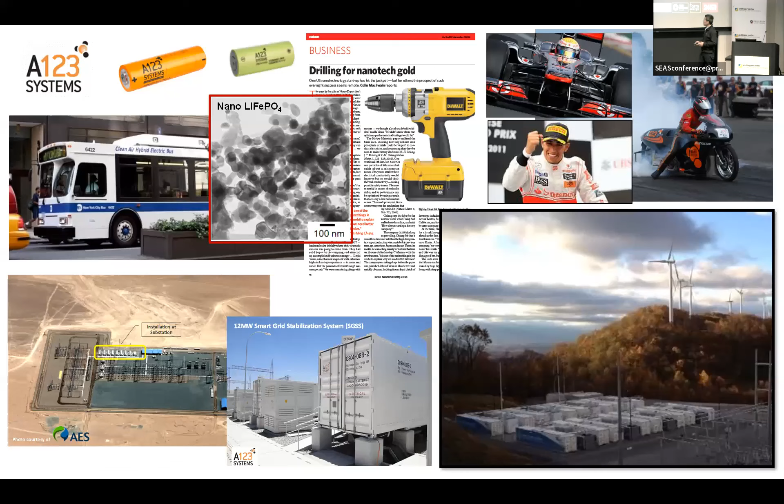So first, let me say a little bit about lithium iron phosphate, and what we did in this case, a company called A123 Systems. People always—some know and some don't know—where this name comes from. So what's this alphanumeric naming scheme you got here?

It turns out that A sub 123 is a force constant—I'll show you that in just a second. But what happened in this case was that we actually started off doing something related to self-assembling batteries. But in the course of identifying materials for self-assembling batteries, we came across lithium iron phosphate, which was then a new cathode material that had not really made it into commercialization at any scale.

We ended up making batteries and building six plants in China, two plants in the United States, and in roughly the 2008-2009 timeframe, we started attempting to manufacture batteries here in the US. This was a high-power lithium-ion battery, and the first product was a power tool. Today it's taken for granted that electric vehicles are fast accelerators, but back then the image was more of a golf cart, and that's what my friends used to joke with me about.

We did a number of things to show that these are high-power batteries. In 2008, Lewis Hamilton won the Formula One title using A123 batteries in the first hybrid system. Every lap, he could discharge once, and he got a lot of power out of that one discharge, and passed a lot of cars.

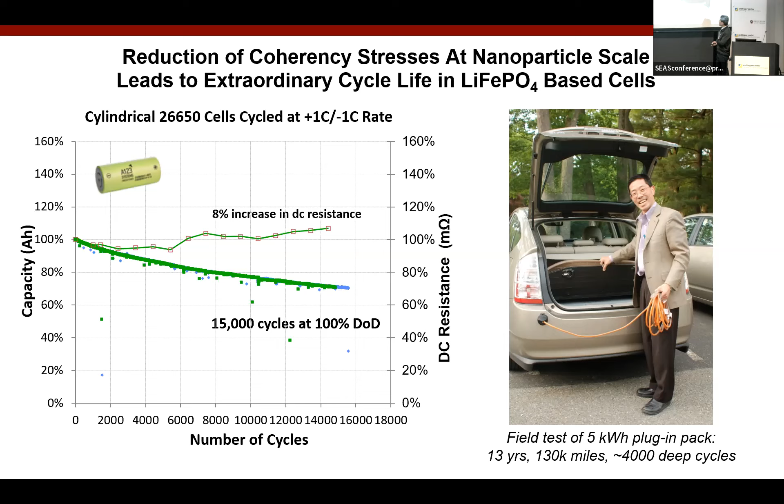We actually started the company based on a concept for self-assembling batteries, where the cathode and anode would repel each other due to negative van der Waals forces, which only can happen between dissimilar materials. We wrote a paper and demonstrated that this could actually work, but we didn't think it could work well enough in practice.

So roughly less than a year into the company's life, we realized that we were sitting on lithium iron phosphate, which is a very interesting material published on, and that we should pivot. So that was an example of a pivot — we pivoted into lithium iron phosphate, and that's where we ended up.

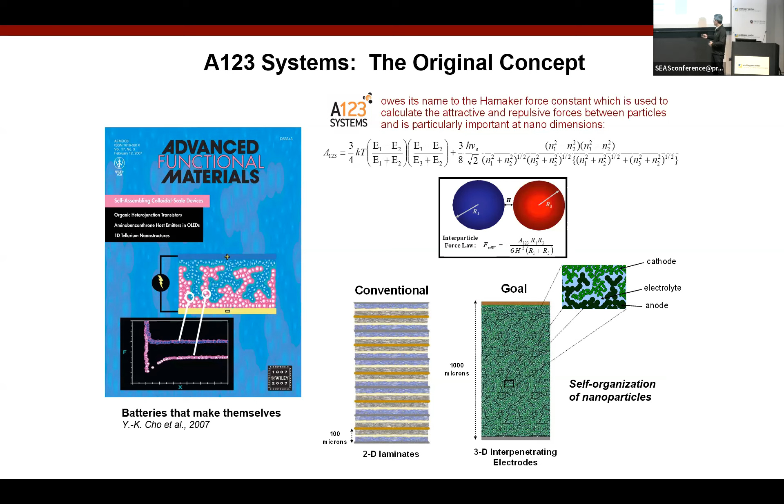That experience with lithium-ion battery manufacturing — what eventually happened to A123? Well, A123 went into bankruptcy around, I think, 2010 or 2011, because of the following phenomenon. We had built 2 factories in Detroit, or near Detroit, that had a capacity of 430 megawatt hours of battery a year — not a gigafactory, but approaching half a giga. Sounds like a lot, but the market simply wasn't ready at that time.

The largest customer was Fisker Automotive. Their entire production over the entire life of that company was less than one-tenth of that annual capacity of manufacturing. Power tools was fine, but when it came to building large EV cells, there simply wasn't enough of a market. It would be, I think, a very different story today. So eventually, the technology that was in A123 went out into 4 separate companies.

The prime acquirer of the technology, Wanxiang Corporation, is one of China's largest auto parts makers. The lithium iron phosphate business went to Johnson Matthey. The grid storage business, those grid storage trailers I showed you, went to NEC of Japan. And then there was a defense and aerospace business which went to a small company in Michigan. So the technology kind of went forth, but the company didn't, right?

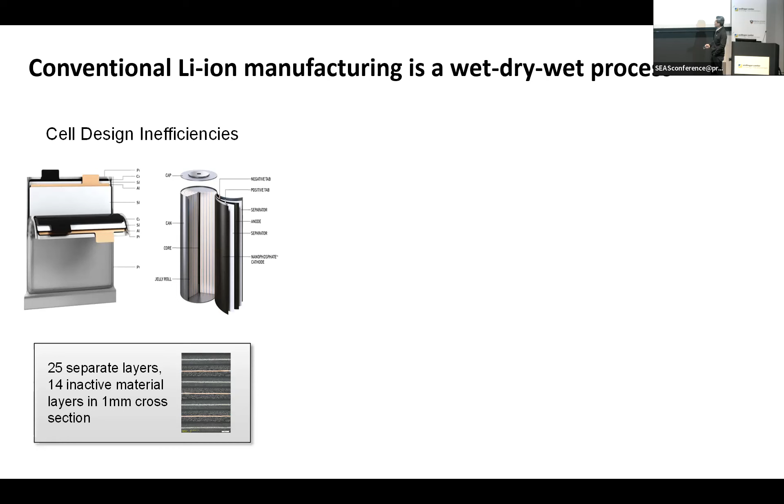One of the things I learned during that time is that the process of making lithium-ion batteries is arduous, complex, failure-prone, and has simply too many unit operations in series in which you can suffer yield losses at each point. I've often made this analogy that if you look at a lithium-ion battery and the number of very fine layers we have, it's the equivalent of baklava. It's a very fine, so it's a bulk product, but it's made entirely of thin films. In this case, these are sub-100 micron films.

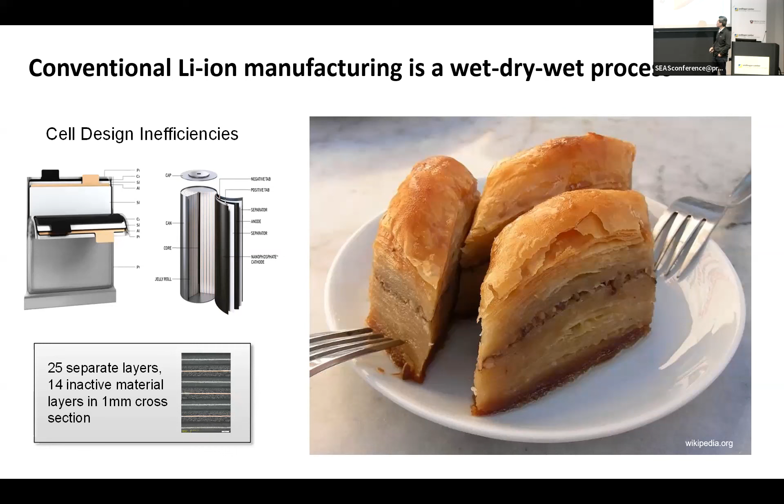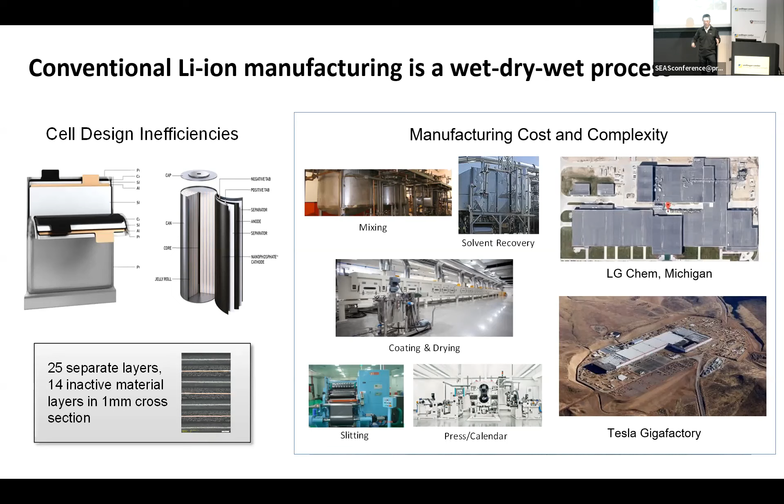One of the things that didn't make sense about this whole process is starting with something wet, taking you through a boiling process—and that's an energy consumption that is undesirable—and then recondensing it to recapture that solvent. So this wet-to-dry process, and then at the end, infusing a liquid electrolyte again, seemed like an unnecessarily complex process. So I had the following idea.

What if we were to get around all of that and not make electrodes, but instead make electrodes that were, from the very beginning, a fluid? So this was supposed to be a flow battery. I think there's a little animation here which shows how this is supposed to work.

We showed that you could take battery cathode and anode materials and design a suspension which was electronically conductive, ionically conductive, and would flow well enough—it wouldn't always jam the fuel cell stack. Most of the time it would jam it, but you could make it so that it would work. You can make a flow battery this way, and here's some data for a lab-scale flow battery. So we thought this is a way to get around the entire manufacturing process.

We started a company called 24M. 24M is named after the concentration in molarity of a lithium-ion battery electrode—24 molar. That's a very high concentration, you'll appreciate. But that's what we were able to do with these liquids. So that's pretty cool, so we named it 24M.

So we pivoted again though, and let me explain how this happened. A flow battery has a lot of attractive features, and probably many of you in the audience know these. You can decouple the energy storage from the power, so you have a lot of flexibility in how you design that. You have components that can be replaced. Importantly, you don't have to make coatings—you don't need a coating line. And we thought all of those were advantages.

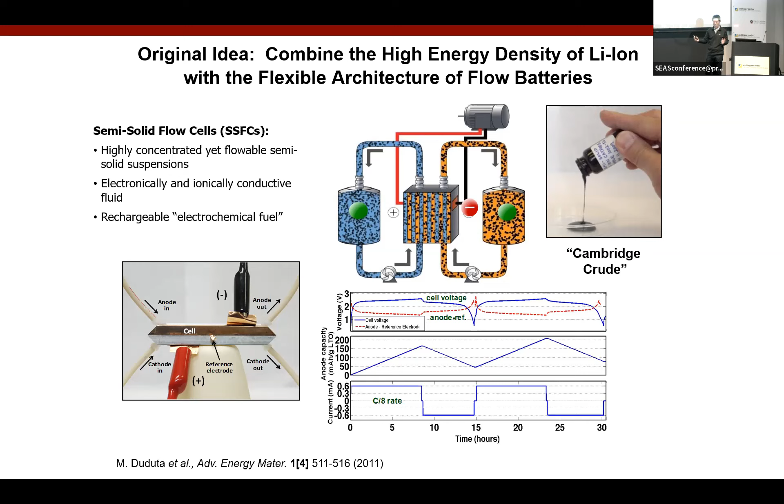But when we sat down and did the techno-economic analysis, what we realized was that the cost benefit in building a battery like this, as opposed to building a regular stack battery, was actually only a few percent, and probably didn't justify the complexity of the whole system. So that resulted in a pivot to a different way to use the same capability.

And this is something called the semi-solid electrode. Currently a lot of people get confused and say, wait, are you a solid-state battery or are you not a solid-state battery? I said, no, we're a semi-solid electrode. It's a battery based on this electrode, which if you hold it in your hand, feels like a damp dish rag. But what it is, is an electrode in which you use the electrolyte as the processing solvent, so you avoid that drying process.

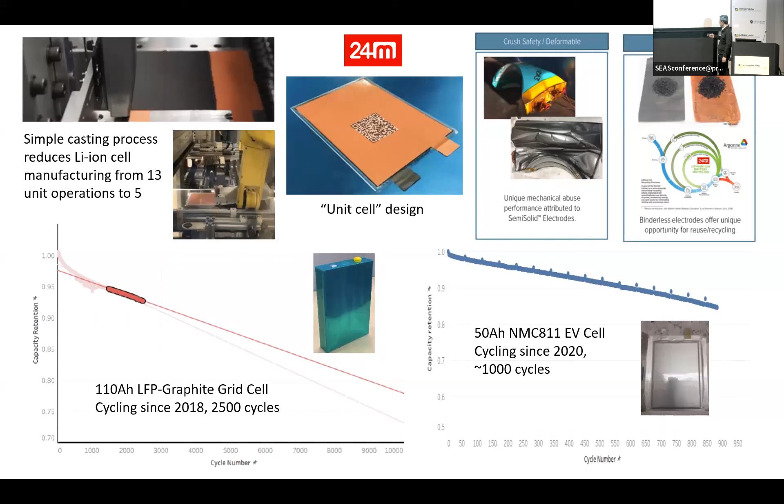So what has happened here is that this was a process innovation, a manufacturing approach. And to get to scale, we decided after a lot of consideration that the best way to do it was to license it as broadly as possible to as many manufacturers as possible. Right now there are 6 or 7 licensees. The most recent one announced was VW, who now owns 25% of this company.

But the first one was Kyocera, and they have their own manufacturing plant in Japan where they make these batteries based on this design for grid storage, supporting solar panels and solar arrays.

Okay, another example of a pivot here. One of the questions I often get asked as a result of having worked in lithium ion is, looking forward, can lithium ion do it all? Now I want to turn to the story of grid storage - this is where I've been spending a lot of my time over the last few years. We all appreciate that lithium ion is a very well-developed and also rapidly scaling technology today. It's embedded in our daily lives.

But the problem we need to address with the decarbonization of electricity is this: from 2020 to 2050, these are all projections, but what this projection says is that solar and wind will grow. Nuclear doesn't show it growing - I actually hope it does grow. But solar and wind will grow, though we'll still have this base load. Coal will disappear, but gas will remain. If we quantify this, it's 780 gigawatts, and later I'll try to figure out how much storage you need in order to take what is a renewable asset that's intermittent and turn it into baseload.

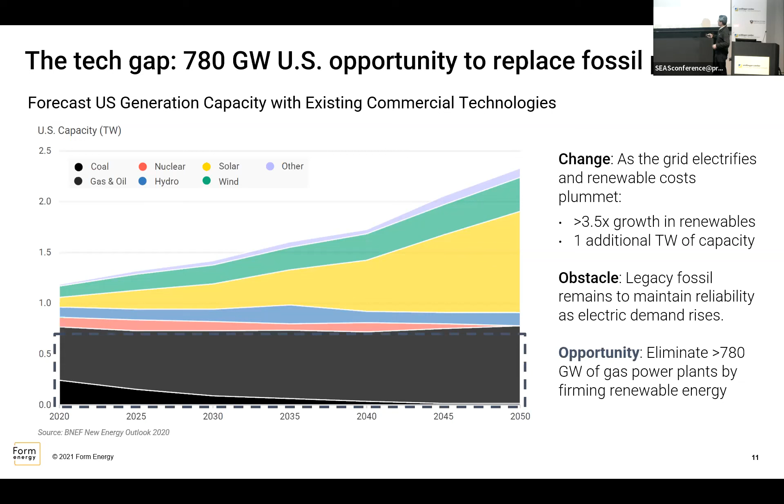But thank you. I'm afraid I can't answer that right away, but we can look into that again.

So here's an example of long duration. It used to be that someone would show up and say, we want a battery for long duration applications. How long do you want it to be? We'd like it to be 4 hours. Okay, today what long duration refers to is really multi-day.

This is all 365 days in Texas in 2021. I'm not sure my pointer will work here, but you can see up here where there are these gaps, especially in the top row, January and February, where it's multiple days.

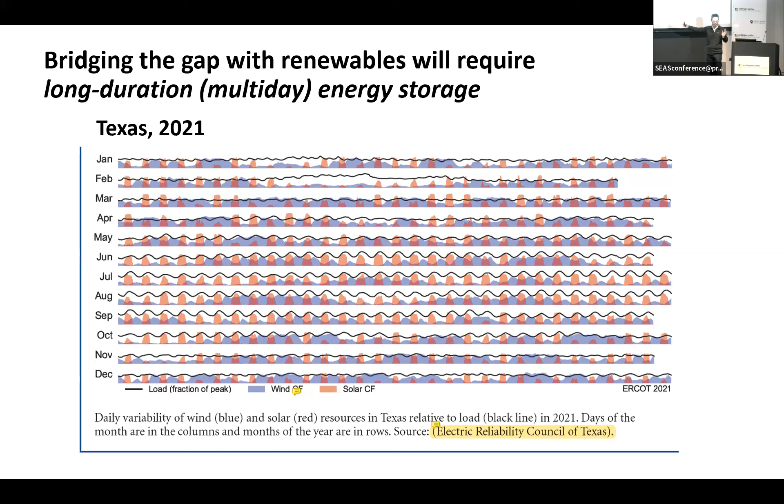Now, there's an argument that eventually you might need an entire season. If you're in Antarctica, you get sun half the year and none the other half, so that's clearly different. But for most of what we need, we'll need multiple days, maybe a week, 2 weeks. So I'm going to use that as a target, and round it off to roughly 100 hours.

So what do we need in order to do that? There are a lot of ways of describing the cost targets for long duration storage, but I'm going to use the simplest one possible. We could get into duty cycles and a bunch of other things and energy throughput, but I'm going to try to simplify it to just this very simple equation.

We have the cost of a natural gas plant, and I'm going to call that $2,000 a kilowatt. If we are competing against natural gas, and we need to store for multiple days, we'll call it 100 hours, 4 days here. Very simply, the dimensional balance tells you that what you need is about $20 a kilowatt hour.

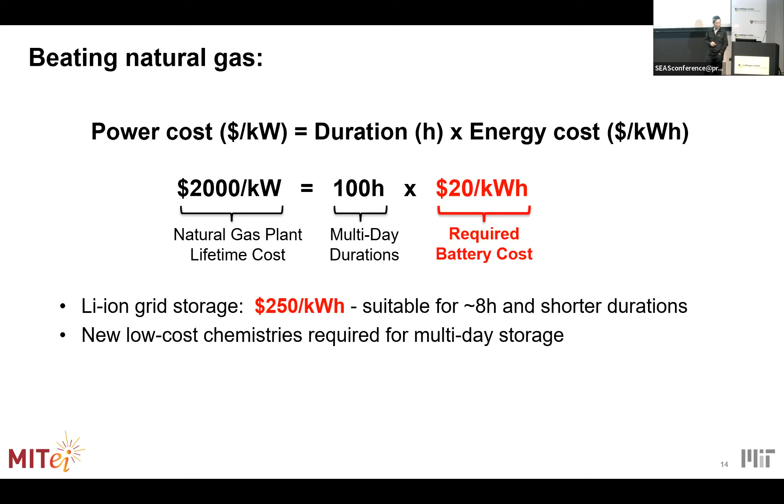So next, the question of how much storage does this really translate to? I have 2 data points here. One is an analysis done at the MIT Energy Initiative, and the second is a recent report from late last year from McKinsey and the Long Duration Energy Storage Council, a trade organization.

They come up with 2 numbers. The first number here is 100 terawatt hours, and you see some of the assumptions that go into there. First, there's an estimate for the US, then multiplied by 10 for the world. The McKinsey study says 80 to 140, so I'm going to round it off to 100 terawatt hours. So what does 100 terawatt hours mean?

It's not a unit we deal with in our daily lives. So one way I think we can think about it is that if in the year 2050 we have 10 billion humans on the planet, this would mean that every 10 people have a battery somewhere supporting their electrical needs, about the size of a Tesla Model S battery pack. So that's what this scale means: 100 terawatt hours worldwide.

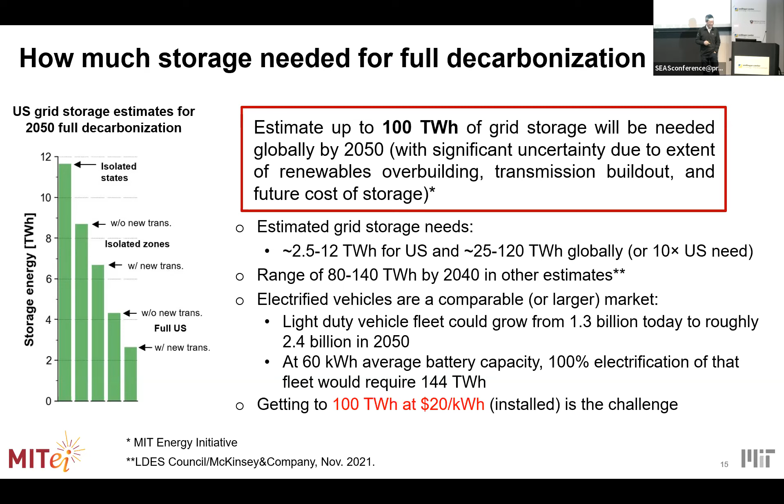Most people react to that as, okay, that seems not crazy, that you might need that amount of storage. So, what are the constraints on lithium ion then? Can we get there with lithium ion? And also, you probably saw that we could double that number if we take into account the EVs that we're going to build over the same period of time. So maybe it goes from 100 to 200, but it's of that magnitude.

So this is a busy plot, let me explain what it shows. References are from my colleagues at MIT Energy Initiative, Elsa and Bob Jaffe. The CAGR on the vertical axis is the compound annual growth rate in production of that metal, mining and production of that metal.

The histogram over here is over the time period that you see, what were the annual CAGRs? So year by year, how much the production changed. In some cases it shrinks. But in this case, you see that the most lithium production ever increased in a single year was 10%.

If you're going to reach 100 terawatt hours by the year 2050, this is what the compound annual growth rate has to be. And what you see is that in the case where all of the lithium you mine goes towards batteries with no other consumption, you need 10%. You might say, okay, maybe we could do that. But keep in mind this means you have to have 10% a year, every year, for the next 28 years.

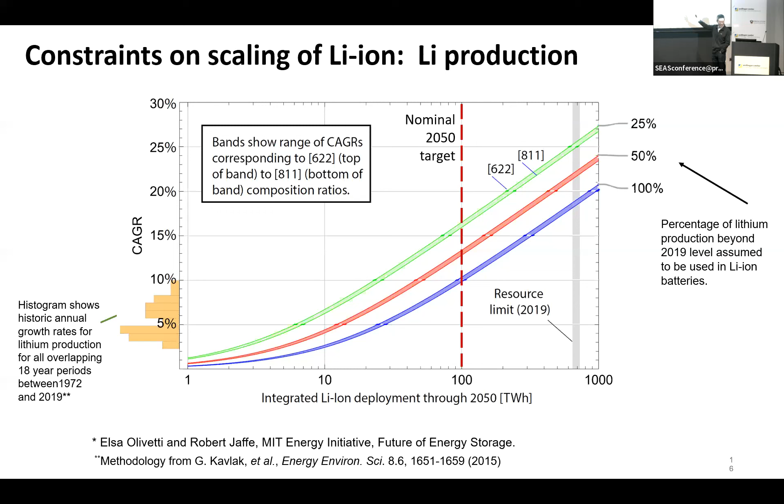So this is a complicated plot, and I'm pausing here because I'm going to show you two more just like it. Cobalt and nickel, same idea. Histogram on the lower left shows historically what's the CAGR in production for each of these metals, and what does it have to be to reach that 100 terawatt hours?

Again you come to the same conclusion for cobalt: there's a precedent that there was 10% in one year, but now we have to do that over 28 years nonstop in order to reach this target. Nickel is a little bit easier, but still a very significant lift.

So the overall message here is that if we were to do it all with lithium ion, we may actually have enough of each metal, but the amount of production required is daunting. I actually assume that for grid storage, neither cobalt nor nickel will be used in the long term. It'll be something like lithium iron phosphate, maybe a manganese-based chemistry. But as long as we do it with lithium, that previous chart will apply.

Are the origins of the lithium, cobalt, and nickel all coming from mining in this assumption, rather than recycling? Any role for recycling? These are all from mining. And yeah, the recycling question is a good one. How much can recycling help us out? I think the simple answer is that when you have this exponentially growing trajectory, recycling is not going to help you out for a long time.

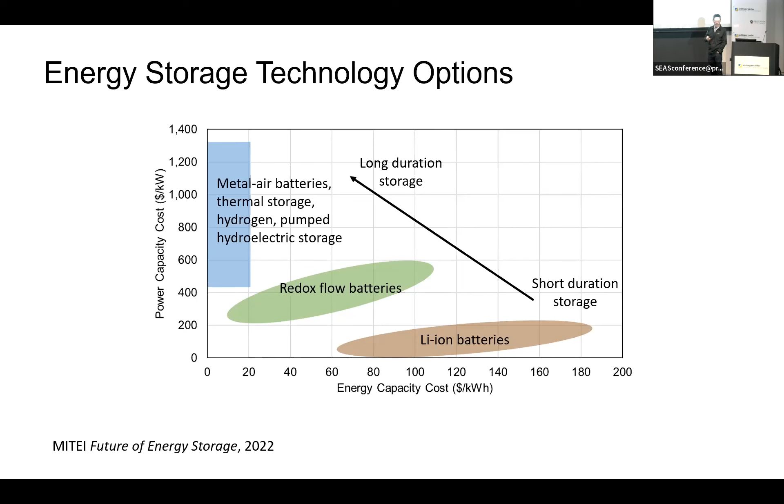And the reason for this is the following: this is a plot that we first conceived of back around 2017 as a way of looking at battery costs at the chemicals level. The argument was the following.

We're going to define something called the chemical cost of a battery, which is the cost of the cathode, the anode, and the electrolyte. You can't store energy without those 3 components.

So you take the cost of those 3 components in the right stoichiometric ratios, the right adjustment for the amount of electrolyte, and you calculate that cost divided by the amount of energy that you can store with that combination.

Because you haven't added any other components, you haven't built the battery, that's not the whole battery cost. It's a floor on what the battery cost is. It's the lowest, the cheapest the battery could ever be. By year, we plotted up all the battery chemistries we knew of at the time.

There's an updated version of this plot that will appear in the report I just mentioned. When you look at this and say our all-in cost is about $20 a kilowatt hour, which is the second line up there, you realize that only those chemistries way below have a chance of meeting these needs. And in fact, why not just go to the lowest that you see here?

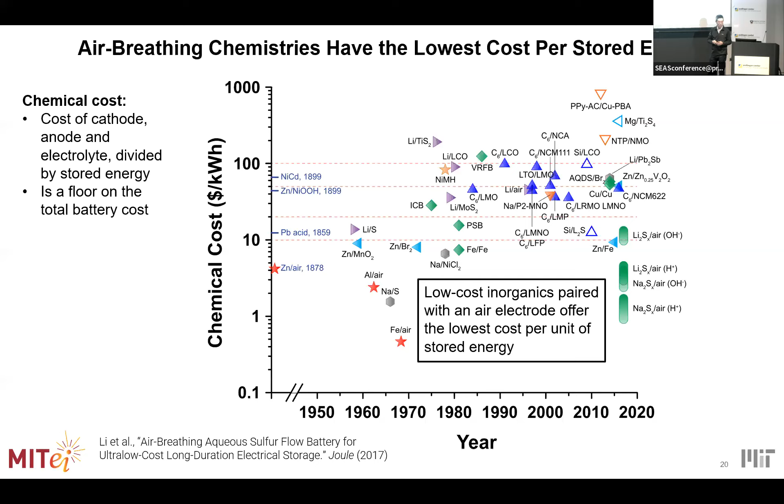The lesson here was that as long as you can use air as one electrode, air is still free, so you're obviously saving some cost there. You don't have the materials cost of whatever that electrode is, and it's going to be the positive electrode. Low-cost inorganic options like sodium, sulfur, iron, used with air, is going to always give you the lowest cost of stored energy. So that's where that thought process leads you.

What we originally started with was under the Joint Center for Energy Storage Research, or JCESR, which is a DOE hub based at Argonne. We started working on this corner here, and we developed several variants on what was intended to be a room temperature sodium sulfur battery. High temperature sodium sulfur has been around since the late 60s.

That battery has very low chemical costs, but it's a high temperature system, and by the time you're done building the system, it's over $1,000 a kilowatt hour—maybe $800 today. But if you could do it at room temperature, our thought was that we could really take advantage of that low cost of sodium sulfur and do it at room temperature.

The first idea is what appears to be a complicated chemistry here, but I'm not going to go into all the details. It's a flow battery, with a catholyte and an anolyte. The anolyte here is a polysulfide solution, and the catholyte uses oxygen, but does not directly use oxygen to oxidize or reduce the sulfur itself.

So what we have here is an alkaline side and an acidic side, it turns out. This device has a very low cost of chemistry. Over here on this plot, you see the cost of chemistry.

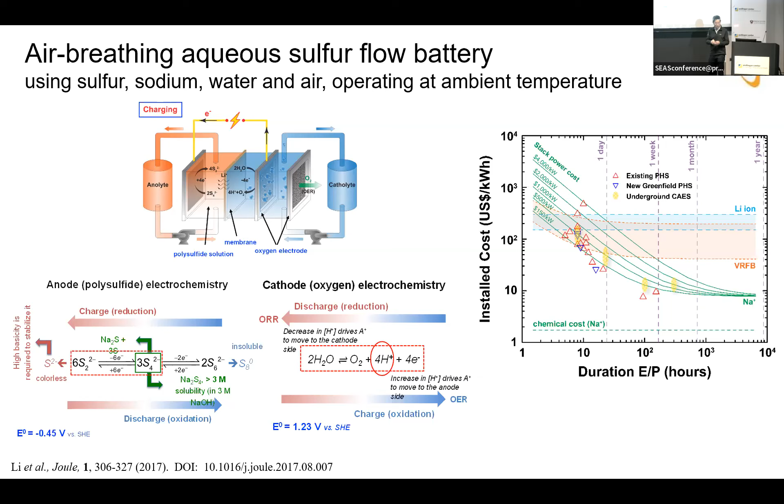So this looked like, for long durations, a design that could have the potential to reach very low cost—you see it approaching $10 a kilowatt hour here. What's plotted up here, the data points, are compressed air and pumped hydro storage. It looked like it might be competitive with that. This looked exciting enough to us that we said, let's try to commercialize this.

One of the things we discovered along the way is that, as anyone who's worked with air-breathing chemistries knows, they tend to be inefficient, because the oxidation reduction of air has a high overpotential and is an inefficient process. If you look at the cell voltage here versus charge and discharge, you quickly see that this is only about 50% round-trip efficiency.

That was concerning, except that when we did the modeling on the impact of that in a world of very low-cost electricity—this is levelized cost of electricity on the vertical scale—as a function of efficiency, if you went from 80% to 55% efficiency, it would only cost you about a penny a kilowatt hour. That was interesting because it told us efficiency was not nearly as important for these long duration storage systems as it is for something like a high-powered lithium-ion battery.

That was a critical piece of learning, because it told us that air-breathing chemistries could have a future in these kinds of applications. Okay, well, I'll tell you what happened.

I mentioned that you need an acidic electrolyte and an alkaline electrolyte. When it came to commercializing this chemistry, we found that materials challenge was really difficult. It basically required invention of a membrane that could be a single ion conductor for sodium, but could at the same time separate a strong acid from a strong base. It didn't take us very long to realize that's a really big materials challenge.

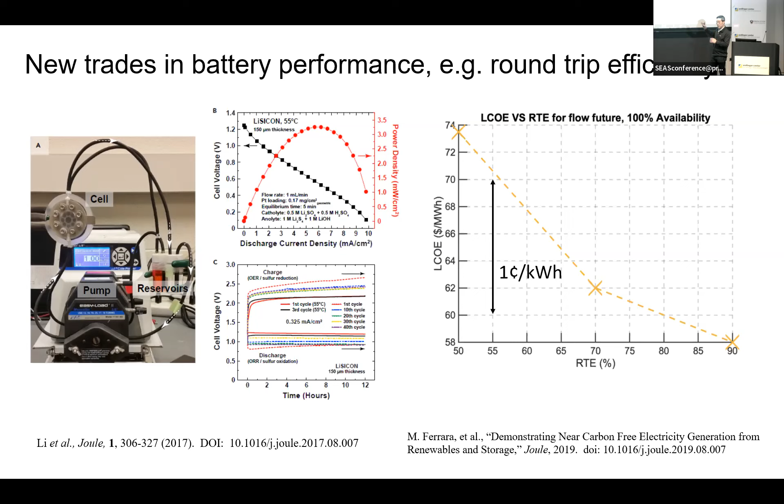But the parameters one would need to meet for this kind of storage were still there. So we turned to metal air systems—again, air breathing, again very low cost. But now instead of using sulfur, which is very abundant, let's use a metal, which is very abundant. Metal air batteries have also been around for a long time.

You can read this faster than I can say it to you, but basically, if you have anything that's a metal, or even silicon, if you can oxidize it, you can make a battery out of it. But relatively few of these are reversible or rechargeable batteries. Right now, I'd say lithium, zinc, and iron are the only ones that really are rechargeable metal air chemistries. This is the chemistry space that we look at.

And one of the problems is that these all have relatively low round-trip efficiencies. But, as I argued in the last slide, that's not a showstopper. Okay.

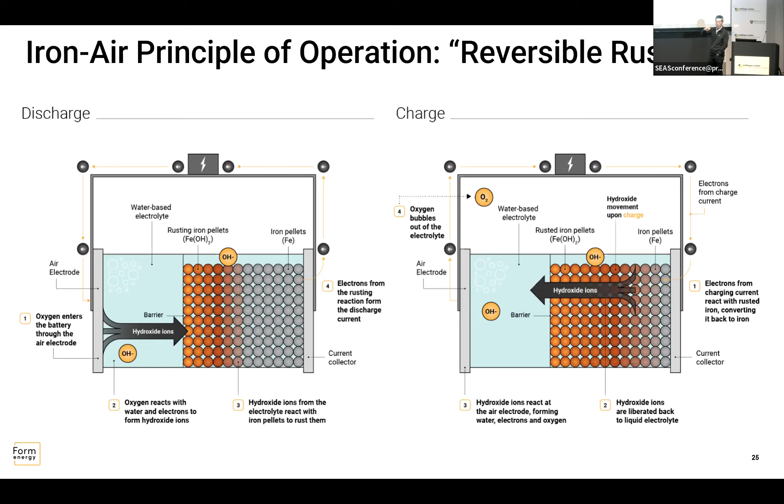Iron air, let's talk about iron air. It's pretty apparent why iron is attractive, and I'll talk about that a little bit. So the iron-air battery is really a battery in which you oxidize or rust the iron in the process of discharging it. You have to remember, if you want to figure out which direction is discharge, it's always what is energetically downhill. Iron loves to rust, so rusting the iron is the discharge step. Charging the battery is the unrusting of that iron, going back the other direction, reducing that oxide or hydroxide back to the metal.

A couple of interesting requirements come into play to make a functional iron-air battery. If you think of the air electrode, that's like the lung of the battery. The iron is oxidizing and reducing, and the air electrode breathes in and exhausts oxygen, so it's a lung. Now, our lungs are bifunctional—you both inhale and exhale. It turns out that to make an iron-air battery work, it's desirable to have two electrodes, one to inhale and one to exhale. So you have essentially two lungs, two oxygen electrodes. The green one is the oxygen reduction electrode that takes in the oxygen, and the gray box is the oxygen evolution electrode, the exhale. That's how this design works.

What you form is iron hydroxide, Fe(OH)2. At deeper discharge, you can also form an iron oxide, but that process turns out to be much less reversible. So mainly you're trying to use this first step. And here is a full cell using an alkaline electrolyte.

This is what a typical charge-discharge curve looks like. Look at the voltage on discharge versus the voltage on charge—right there you have a round-trip efficiency, and you can see that's going to be about 50%. The second issue is that if you look at the capacity, the charge line is longer—you're putting in more electrons to charge it than you're discharging. That's another source of inefficiency.

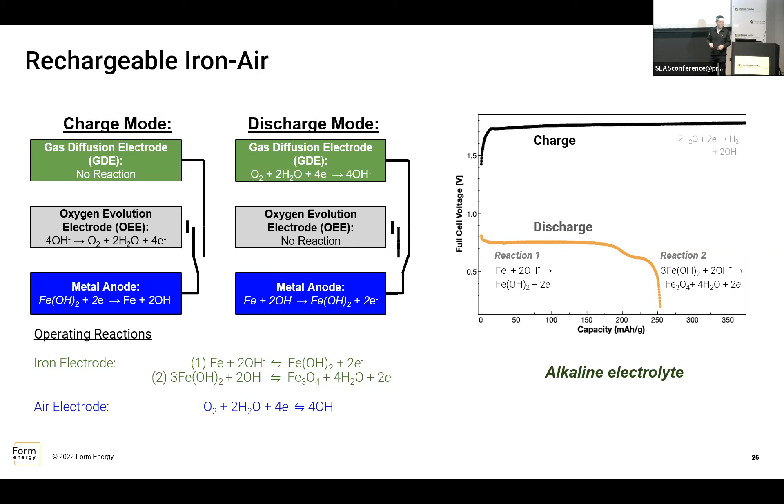And so, I'm being very upfront—these are the deficiencies of this system. But for long storage duration applications, it all still works.

So this is the history of the iron-air battery. There's actually been, over the last decade or so, a lot of work, including from Sri Narayan's group at USC, who spent a lot of time on this. There was earlier work targeting applications for which this really is a terrible battery, like an EV battery—the EV applications.

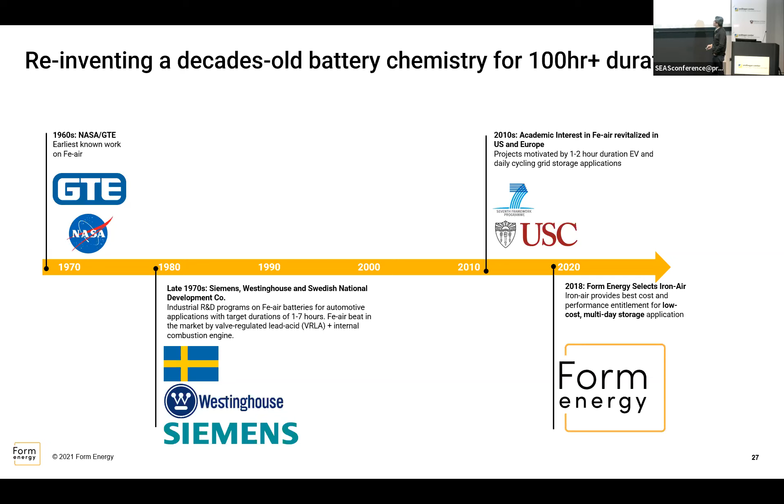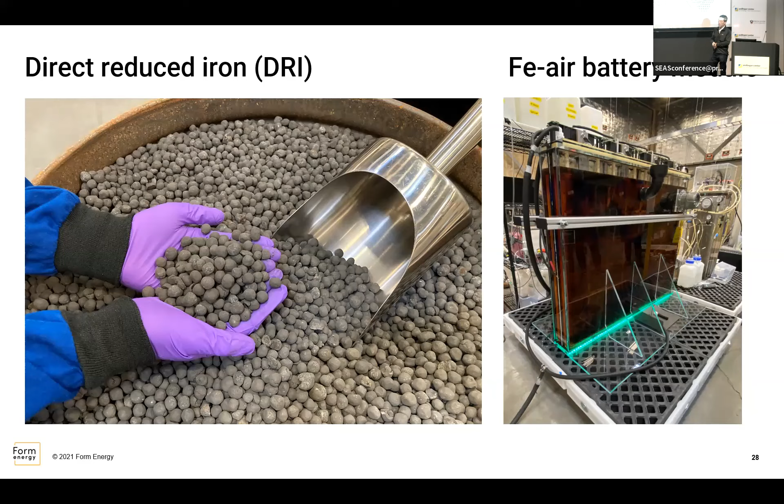This is how iron is produced today. Direct reduced iron is the stage at which we take our iron ore pellets and reduce them to metallic iron. So if we want metallic iron as the starting state, this is the place to grab it. And that's what

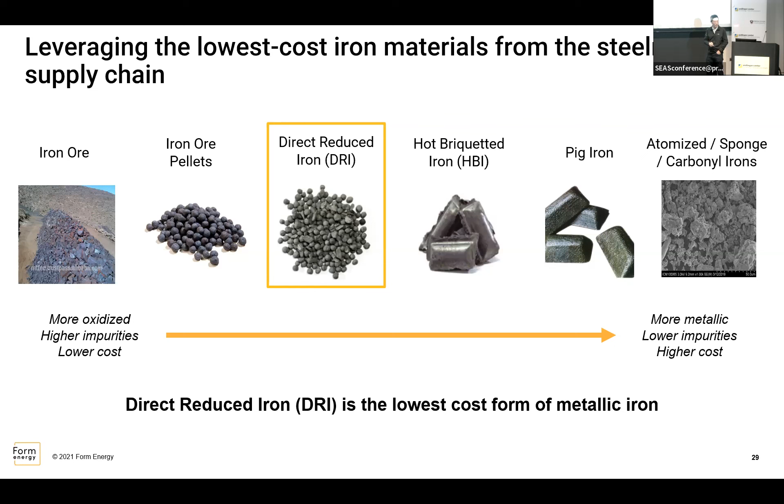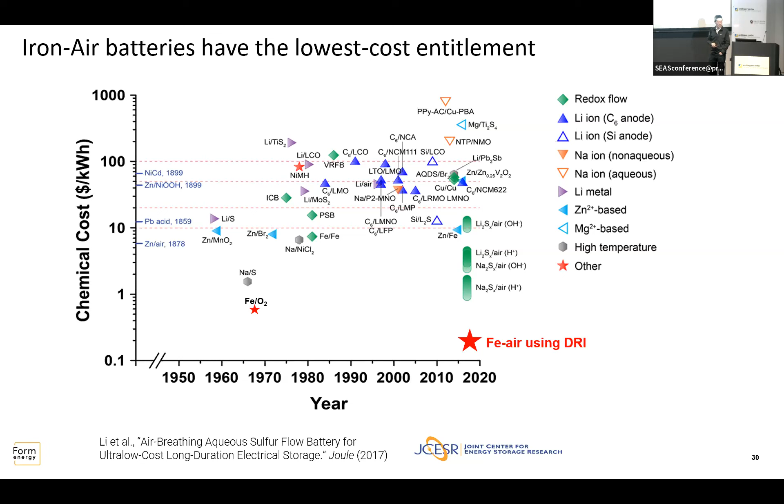Form Energy is doing with this entire approach. Okay, back to this plot—iron air using DRI is even lower cost. That's where it sits. Okay, all right.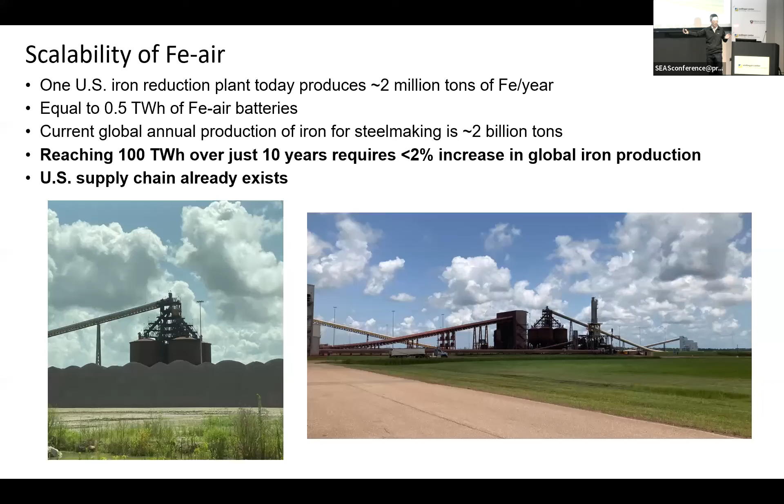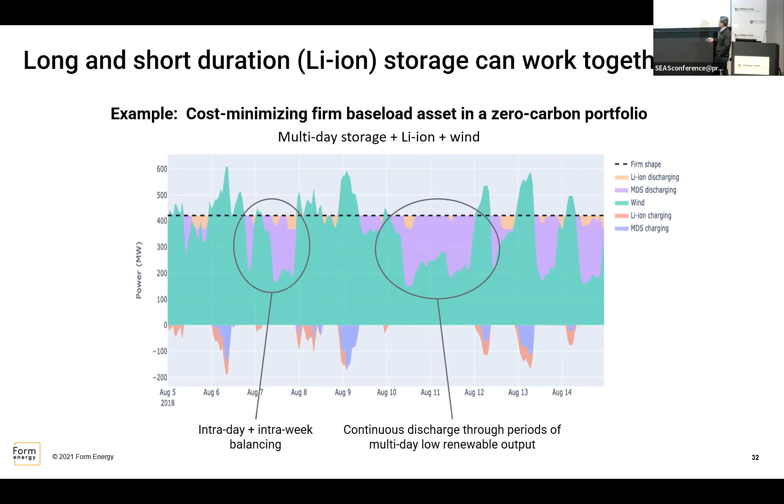I don't want to give the impression that iron air does everything. The ideal scenario, this cost-minimizing model, power versus time, still would have short duration storage slotted in there. You see those yellow shapes, that's lithium ion, right? That's the cost minimizing combination. You could not use those and just build more long duration storage, but it'll cost you a little more. I think there continues to be a role for both short and long duration storage here.

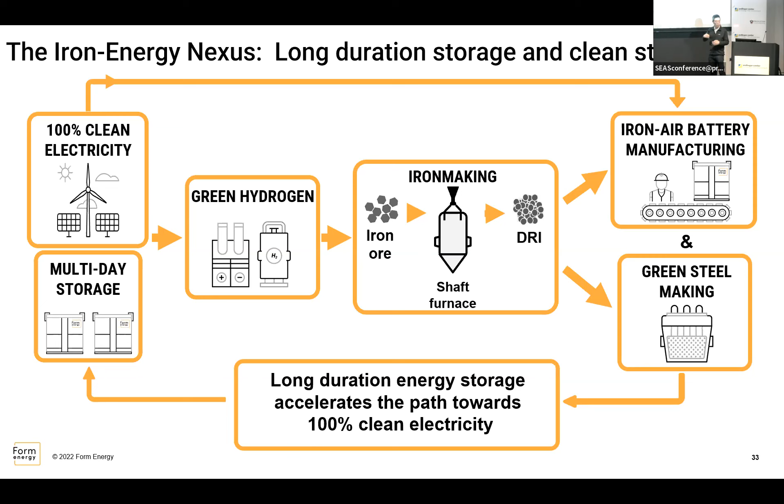There's one other connection here, an interesting synergy taking place between what's going on in the steel industry. Iron is today reduced, those plants I showed you, using natural gas. But for both that and later stages of steelmaking, there's an evolution towards hydrogen. So where are we going to get that hydrogen? If it's green, it's going to be produced probably electrolytically. There's a synergy here between clean steelmaking and long duration storage in which we use that iron for this process.

Okay, all right, how much time do I have? 5 minutes, perfect, all right.

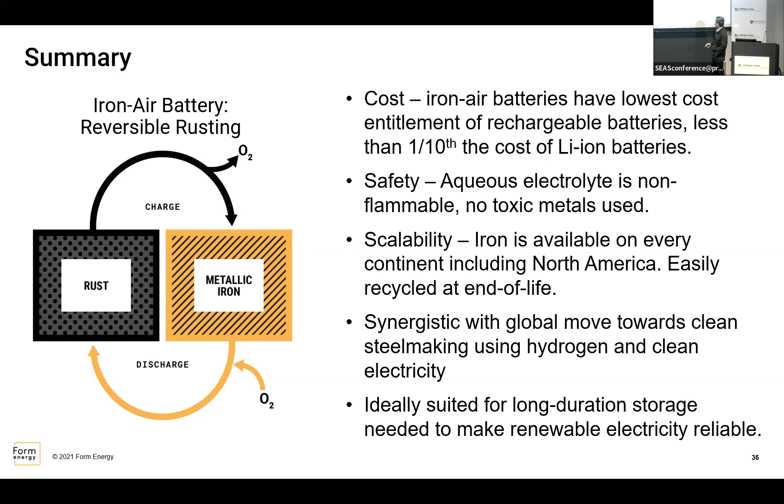I think I'm going to skip this summary because I've pretty much said it all. I just want to spend the last couple of minutes talking about a new initiative. I'm going to spend my last couple of minutes here recruiting for a new initiative we've just started at MIT called the MIT Climate Grand Challenges. We have a new center that's just started called the Center for Electrification and Decarbonization of Industry. With this very low-cost electricity that we all anticipate we'll have, we can store it and use it like I just described, or we can use it for other purposes.

This is really directed towards the following. What we've done here is create a center which was down-selected over a 2-year process. We're one of 5 flagship projects. There were initially 100 proposals, now down to 27 full proposals, out of which 5 were selected, and we're one of that initial 5.

It's intended to tackle these 4. These together constitute 15% of all human emissions of CO2, and almost half of all industrial emissions. So if you take the industrialized world, just these 4 is almost half of it, 45%. They're roughly in rank order like this. Actually, I think these last 2 are flipped. But cement, steel, ethylene, and ammonia. The idea is to develop electrically based processes, a lot of which will be electrochemical processes, in which you can synthesize each of these materials and decarbonize through the electrification route.

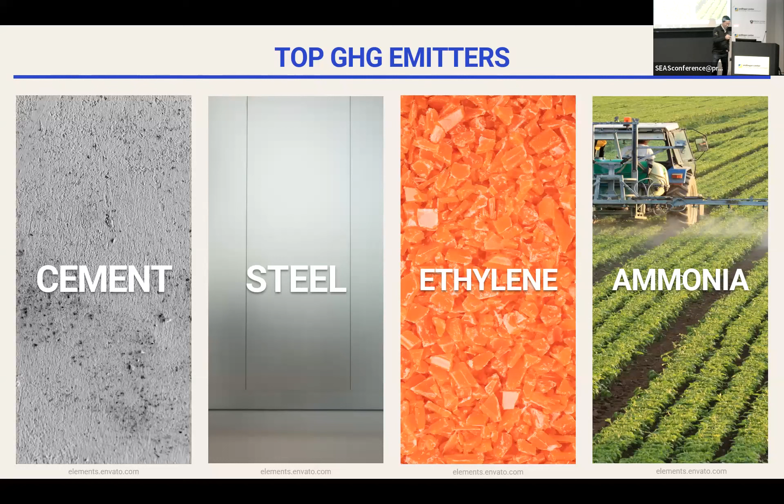Exciting talk, Yet-Ming. I really like that last slide on green manufacturing and decarbonization. We actually submitted a proposal to NSF for the Science Technology Center involving 8 faculty from MIT. If we are invited, I'm going to call you. Thank you very much—some of those 8 may already be part of our project.

We have roughly close to 20 faculty who have expressed interest.

One of the major advantages of lithium ion, at least in grid applications, is the ability to change the duration—you could build a half-hour battery or a 10-hour battery. Do metal air batteries, or iron air batteries, offer that same kind of design flexibility?

I'm glad you asked this, because one of the things you'll read in the news today about long-duration batteries is this wonder that we have a 100-hour battery. If you're a battery engineer, or even if you're not, think about this for a moment: I have a 100-hour battery. What's the big deal? You can take any battery and discharge it over 100 hours. It all goes back to that equation I showed you—can you discharge over 100 hours and still meet a particular cost target?